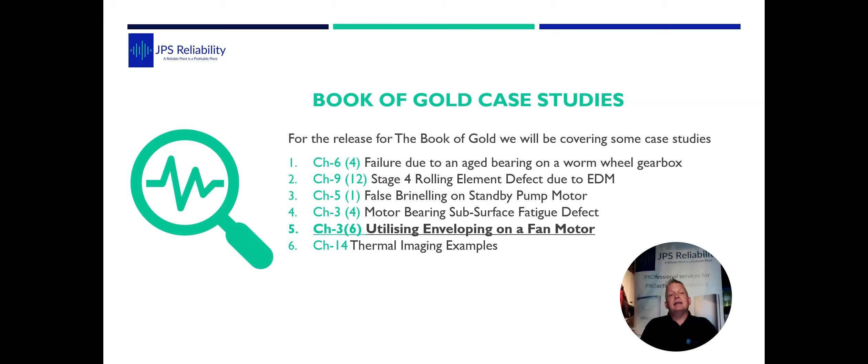So this one is case study number 5, and this is using SPM HD enveloping on the fan motor.

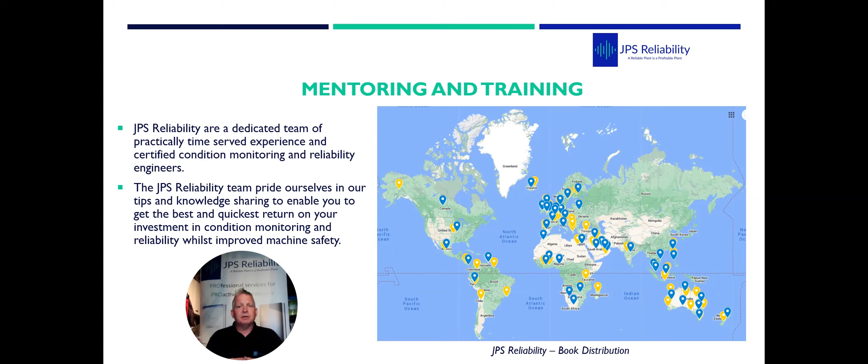Back to the case study. So this one here is a process fan in a production facility. So you've got your motor, your drive belts going up to your fan on your pedestal, and it's just a circulating air fan. So it's a clean air fan. It should run forever.

But this case study is really good, how it shows that even using trend as your friend, you can pick out when to change that out at the opportune moment so the fan doesn't break during production. And then the reliability loop of it is, why did it fail? Was it age related? Can we prevent it from failure? And you try and eliminate it.

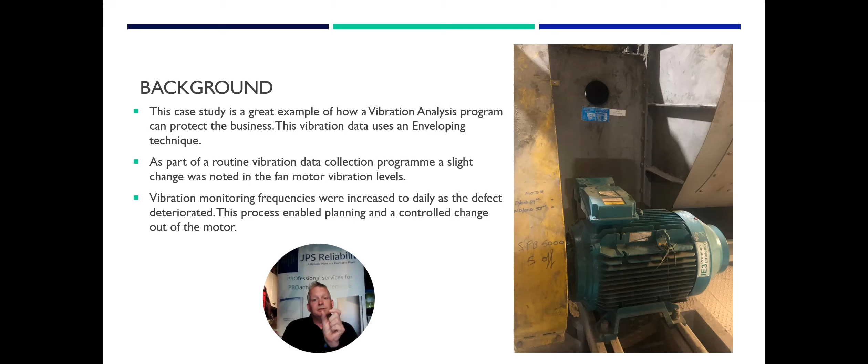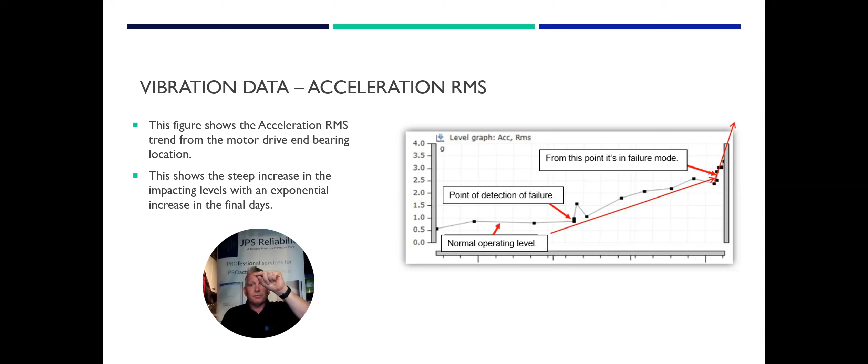Looking at the SPM HD enveloping, this is really good and it's very crisp and clear. So we could see a nice clear signal at 3.09 orders, which is the outer raceway, and lots of harmonics. When you do analysis, as a chap in Australia said to me, you got to get your life in orders. You analyze in orders. Me personally, I flip between hertz and orders, because in hertz you can pick up your electrical frequencies quite easily, and you know what's rotor bar and your drive frequencies.

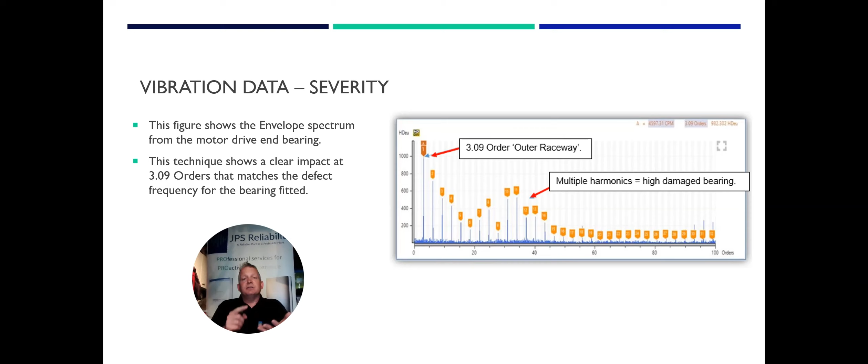But in orders, a bearing going 2 RPM is always going to be a 3.09 orders defect. If it's going 1000 RPM, it's 3.09 orders. The order doesn't change, whereas CPM, RPM does. So if you get your life in orders, you can easily pick out outer race, inner race, ball spin, without even knowing the bearing defect or the bearing part number in it.

So this very short presentation shows you that just monitoring the trend and the orders, we could pick out a clear outer race defect. And these levels would confirm a spalling in the raceway. So to reduce the risk of failure, they got a new motor and they placed it on site in the area which wasn't subject to the environment, kept it away from vibration, and waited. They had a shutdown on the line for another job, and they changed the motor out. So we managed to change the motor in the stoppage. So it didn't stop the plant, didn't cause any failures.

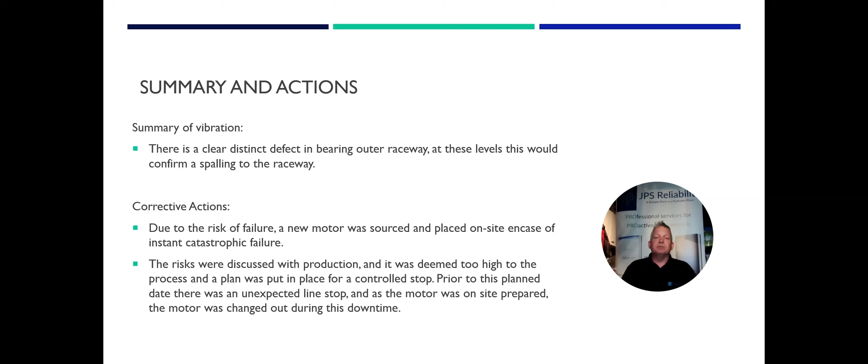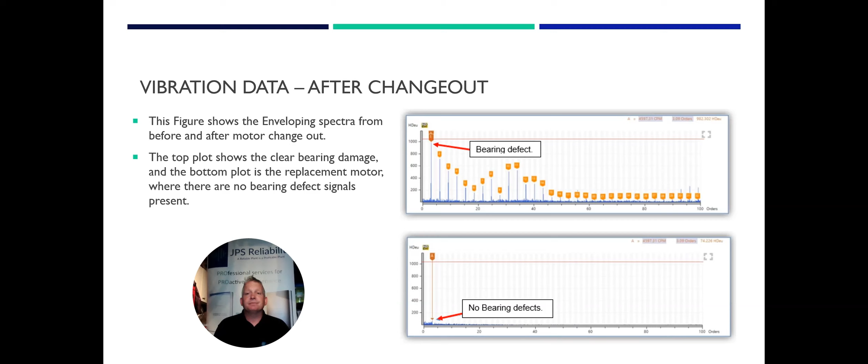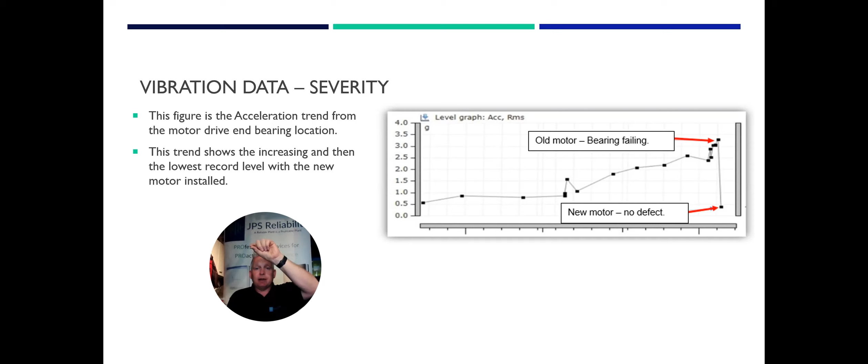And what you must do when you do this is go back afterwards and see, has it improved? Well, the top plot is with the bearing defect, and the bottom plot, no bearing defect. So you can say the new motor is commissioned, installed, and it's running good. This is a trend, so we can see the levels have actually come down lower than what they ever historically have been. So we've got the old motor going up, the extra dots where we're sampling even more, and then boom, down when the bearing was changed.

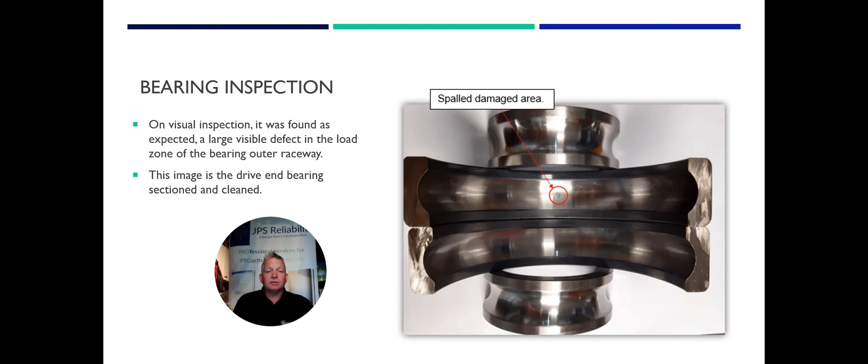So on bearing inspection, what we actually found was a spalled area on the bearing. We did say, how long has the motor been in? No one knew. They all thought it was the original motor, been in there for years, and it's just ran, because it's a nice clean air fan. And when you're actually looking closer on the bearing inspection, you can see the spalled area, the direction of rotation, and the overall damage. And you can actually sort of see some cracks.

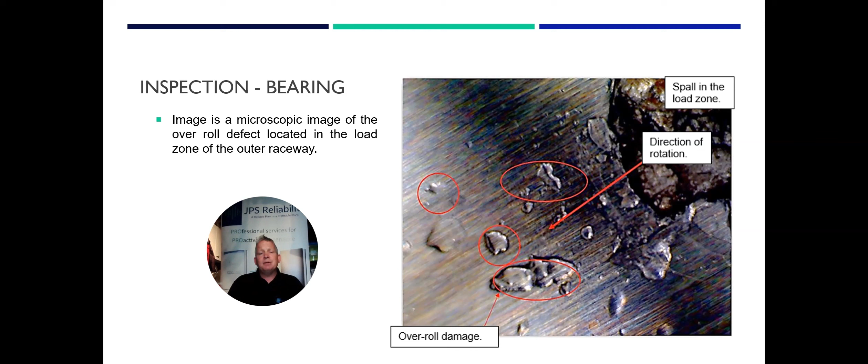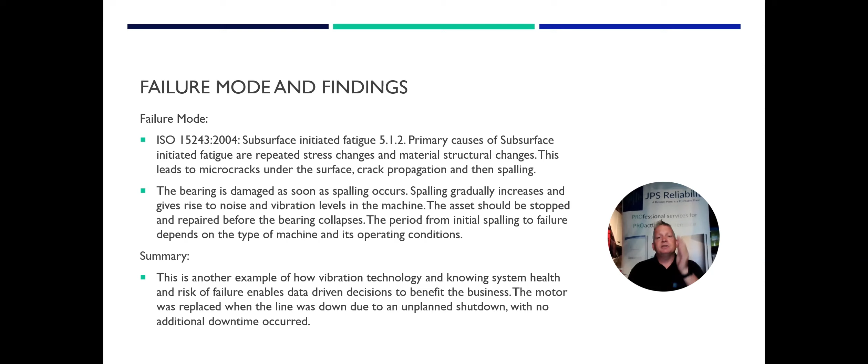So when we looked into it, the most probable cause of failure, which is very, very rare, is age-related failure, subsurface initiated fatigue. So this motor had been there for so long, maintained good, but it's just reached its cyclic life and it needed changing. So this is another great example of how with this technology, knowing your system, the risks to the plant, you can use controlled maintenance. And in this particular case, we can't improve reliability as such because it is end of life of the bearing. But if you do get a defect, you need to work out why it happened and can you prevent it from happening.